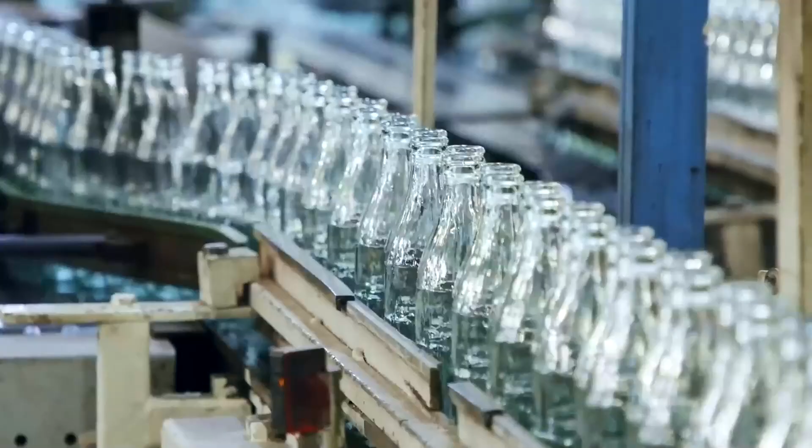2 billion tons of waste are produced by humans every single year. Glass makes up nearly 20% of this global mass. One can notice how discarded bottles accumulate in landfills, where a single unit persists for over 1 million years without breaking down. But this is just the beginning.

Why is this durability actually an industrial advantage? It seems counterintuitive for waste management, because glass can be recycled forever without ever losing its original quality. At first glance, broken shards appear to be useless debris, but in reality, they are ready for infinite reuse.

Hundreds of tons of material arrive daily at one of the world's largest recycling factories. The raw glass moves toward machines that will turn messy fragments into clean, shiny bottles. It gets more complex further on. The unbelievable journey of sustainable recovery is now underway.

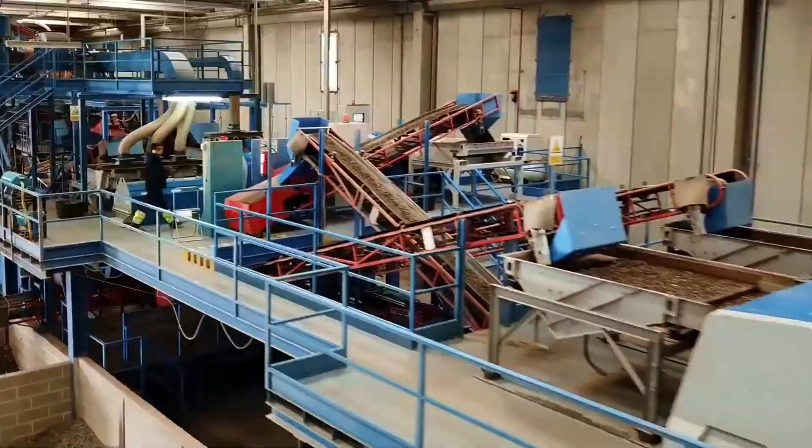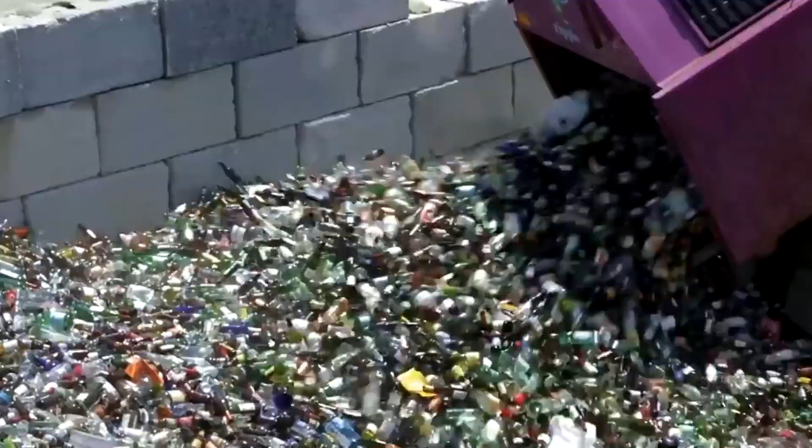10 to 20 cents? This is the precise value assigned to a single empty glass bottle in many European countries. Why is such a specific price tag attached to what appears to be garbage? At first glance, tossing an empty soda container into general waste seems like a convenient disposal method. But in reality, this mixes glass with household refuse, making the subsequent sorting process prohibitively expensive and technically difficult.

To handle this problem right at the source, automated return machines are installed across city streets. Consumers simply place an empty bottle into the intake, and one can notice how the device immediately scans and sorts it. A small refund is issued, meaning a freshly finished beer bottle transforms from waste into a valuable asset with cash value.

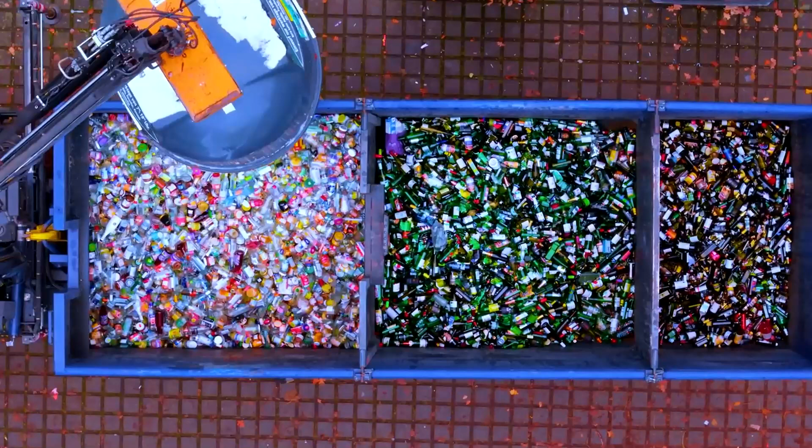This approach motivates people to collect bottles on their own, providing factories with a stream of glass that is pre-sorted, clean, and consistent. But this is just the beginning of the logistical journey.

When the reverse vending machines are full, collection companies deploy specialized trucks to pick up the accumulated glass. Forklifts lift large plastic bins, each holding thousands of empty bottles, onto the cargo beds. A single full-size truck can carry between 20,000 and 30,000 bottles in one trip, equal to about 10 to 12 tons of material. Trucks loaded with these tens of thousands of empties make their way from supermarkets directly to the recycling plant.

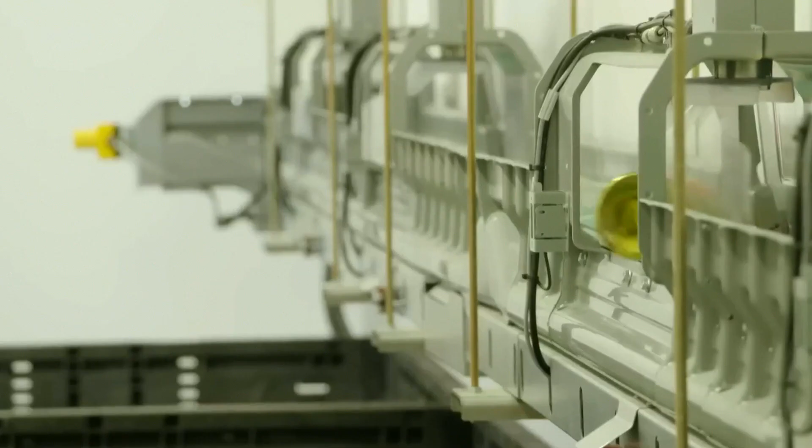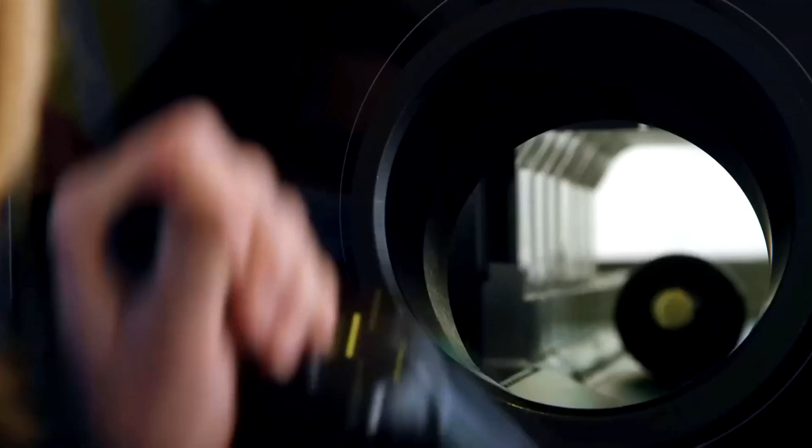Upon arrival, the drivers back up to a massive storage bay and release the load, sending a cascade of bottles tumbling down. In just minutes, the ground fills with colorful mountains of glass that sparkle under the industrial light. Greens, browns, and clears stack together in giant heaps. These piles are not just waste. They are the starting point of the entire recycling chain. A steady supply of raw material now lies ready to be cleaned and crushed.

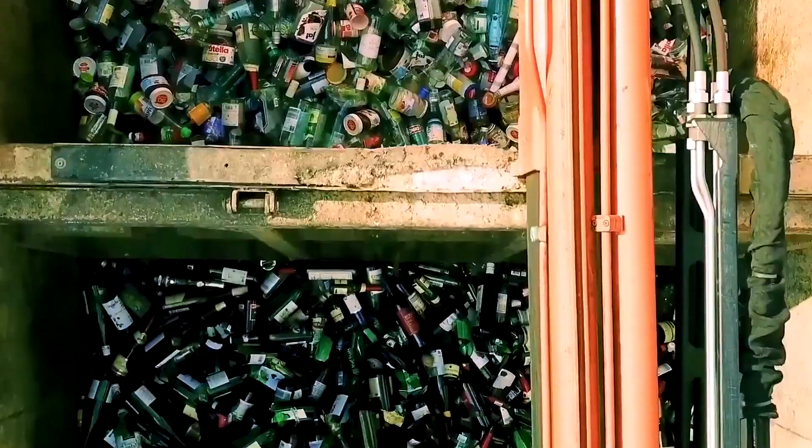Tens of tons of waste glass tower in chaotic piles, awaiting their turn for transformation in the recycling yard. Massive loaders drive up to the mounds, their engines straining as they scoop up huge loads with reinforced buckets to carry across the facility. With a thunderous crash that echoes through the site, the glass is finally dumped into the plant's feed hopper, sending a sharp cascade of shards sliding down the steel chute.

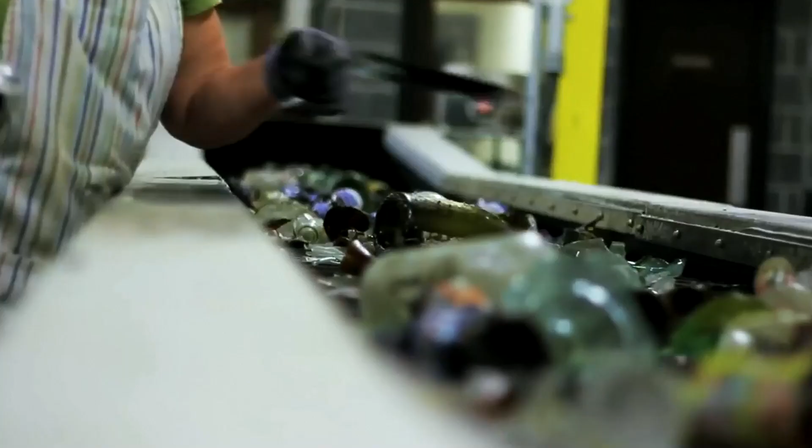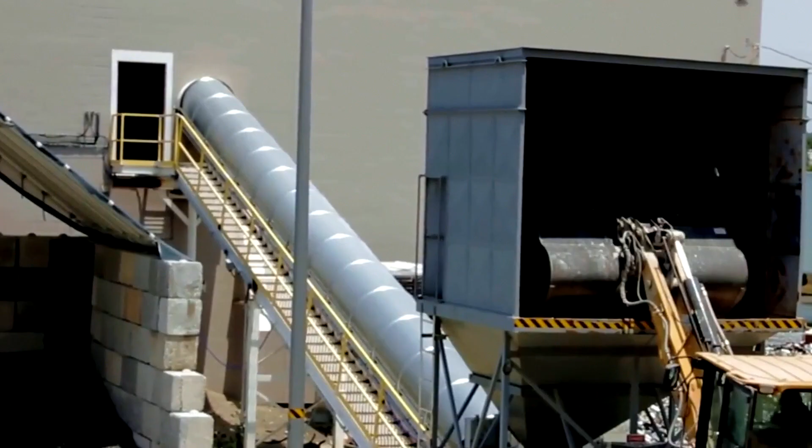This aggressive start launches the material into the recycling cycle, but the path to purity is long. The steel conveyor immediately starts moving, carrying the jagged stream of glass, still heavily mixed with dirt and sand, deep into the heart of the facility for processing.

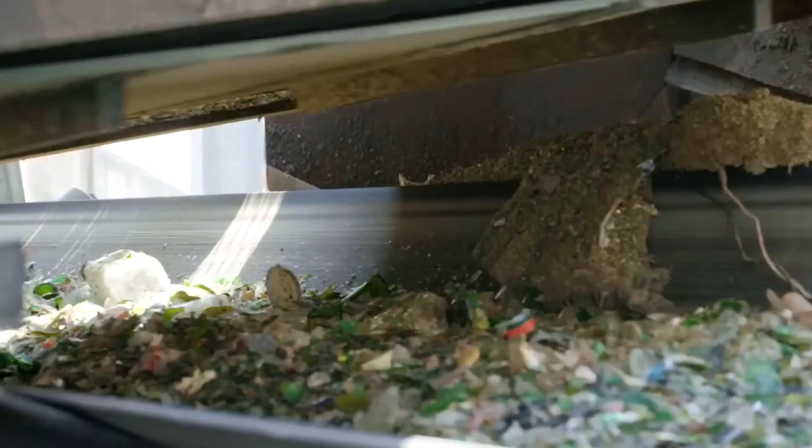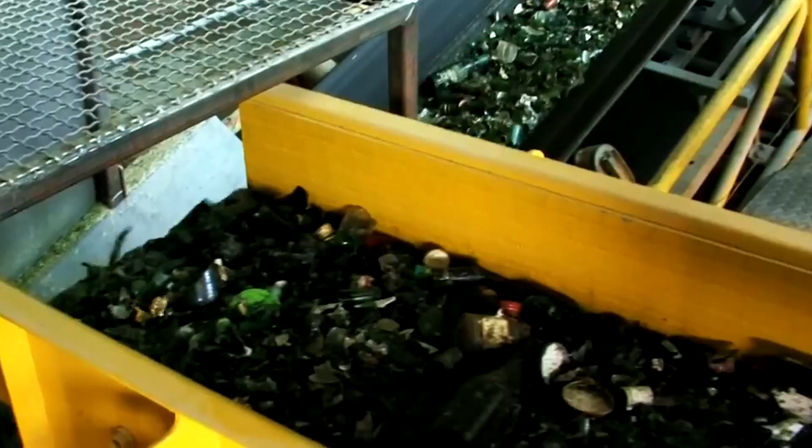At first glance, the vibrating screen looks like a simple sieve, but it performs a critical separation. Powerful mechanical shakes dislodge and filter out dust, grit, and tiny particles that would otherwise contaminate the melt. One can notice how the fine debris falls away, leaving the main glass flow significantly cleaner. However, larger contaminants that machines cannot easily detect still remain in the stream.

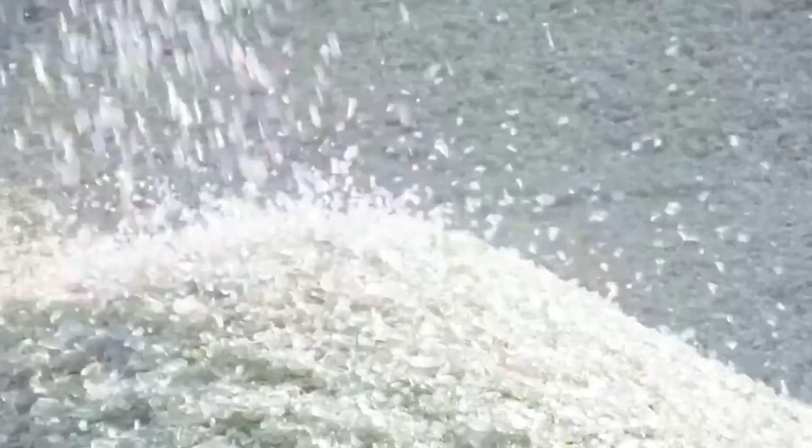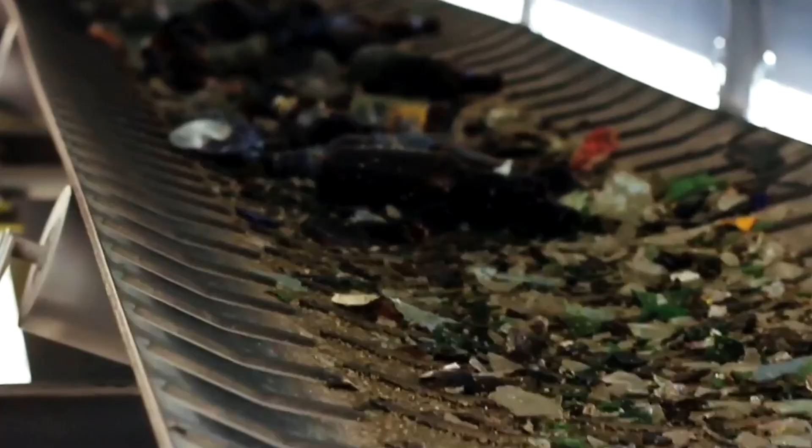Along the conveyor belt, human oversight comes into play. Workers stand ready at the line, their eyes scanning the moving belt to carefully pull out paper, plastics, and any other foreign objects that do not belong. This blend of mechanical screening and manual precision produces a much cleaner batch of material, ready for the next step in the recycling journey. It gets more complex further on.

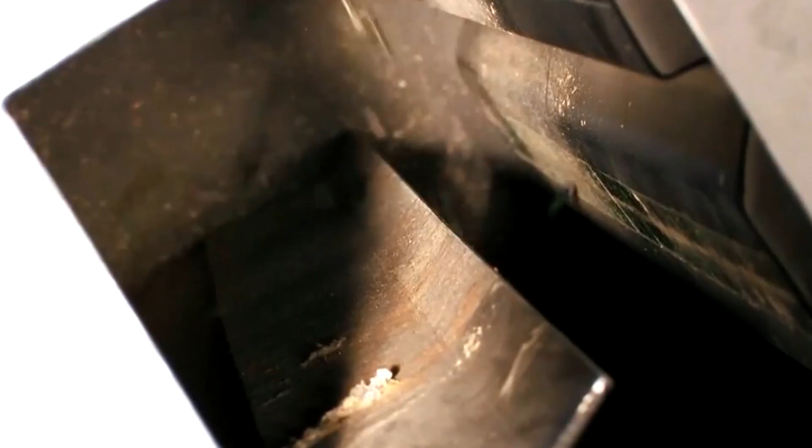Do you know what is still hiding in that moving pile of broken glass? To the naked eye, the flow seems to consist only of transparent shards, but the bottle caps are often made of metal, posing a severe threat to the furnace. Fortunately, a high-powered magnetic separator solves this problem effortlessly. The principle is simple yet effective.

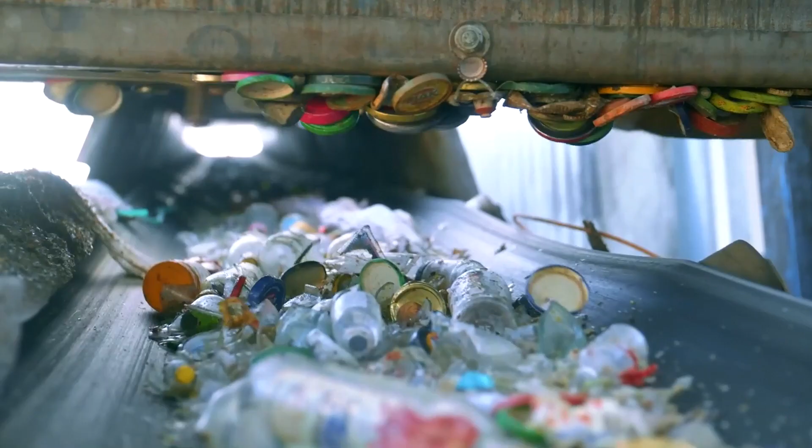A strong magnetic field grabs the bits of steel and lifts them away, while the non-magnetic glass keeps moving down the conveyor undisturbed. Thanks to this step, the raw material is now about 80% clean and one step closer to its journey of rebirth.

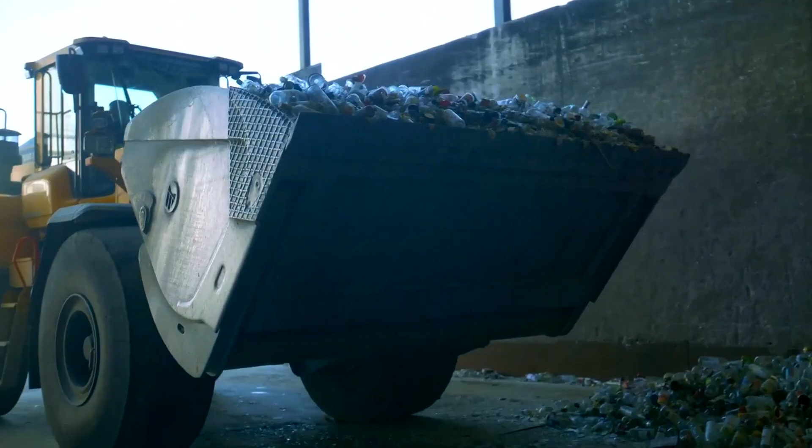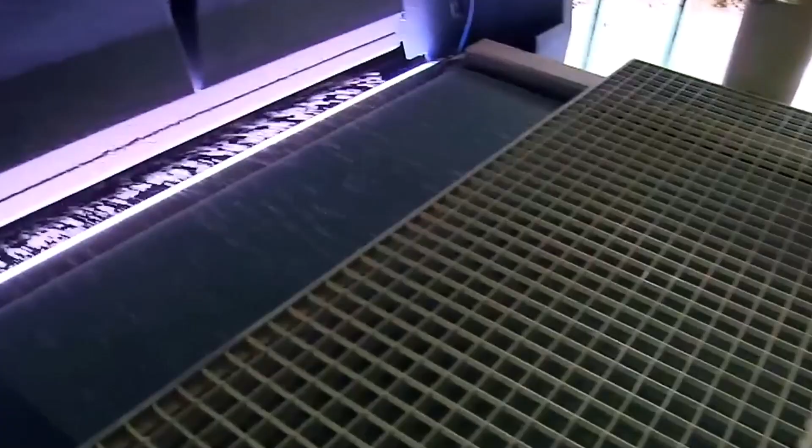The glass moves on to the next crucial step, being ground into cullet within a hammer mill. A massive machine with high-speed rotating hammers smashes the glass over and over until only tiny fragments remain. Any pieces that are still too big are automatically detected and sent back through the mill until they reach the right size. This ensures the entire glass stream becomes uniform, with no stragglers slipping through the cracks. The process creates cullet, fine, sparkling glass particles that look almost like man-made sand.

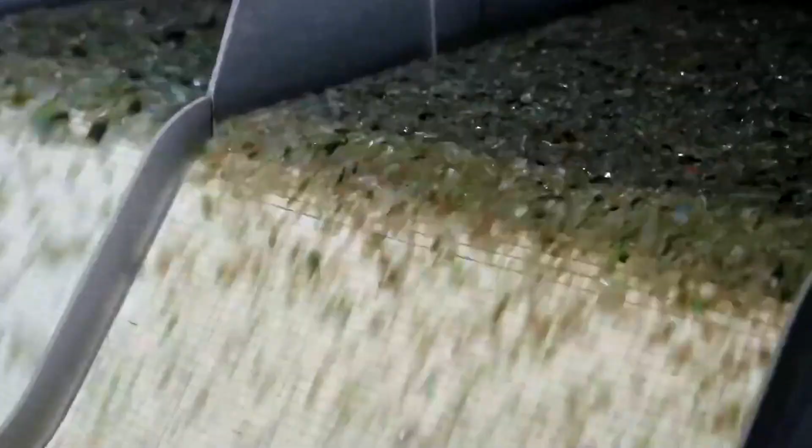Because it is broken down so small, cullet melts much faster in the furnace, saving up to 40% of the energy compared to using raw materials like sand or limestone. And this is not the limit. One can notice how the cullet enters a powerful suction system, where a strong stream of air strips away and blows off any leftover label fragments, leaving the glass even cleaner.

Optical sorting represents the most precise step in the entire process. As the glass cascades down like a shimmering waterfall, laser sensors continuously scan each tiny fragment to detect its color and composition. The moment brown glass, green glass, or even a stray ceramic shard is identified, the system instantly fires a precise puff of air, shooting it into a separate stream.

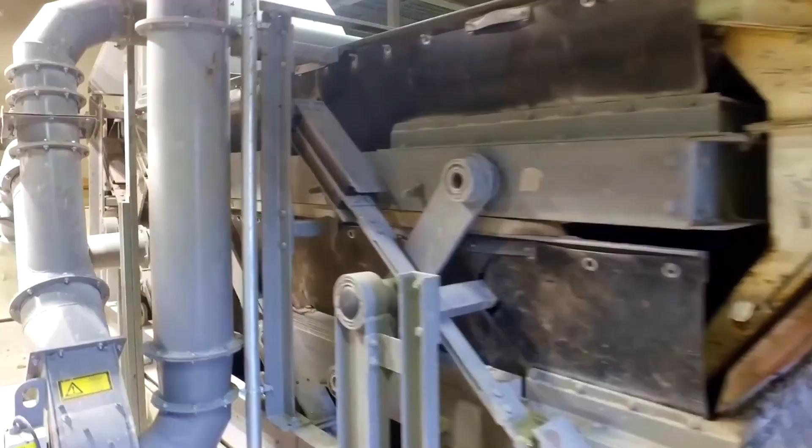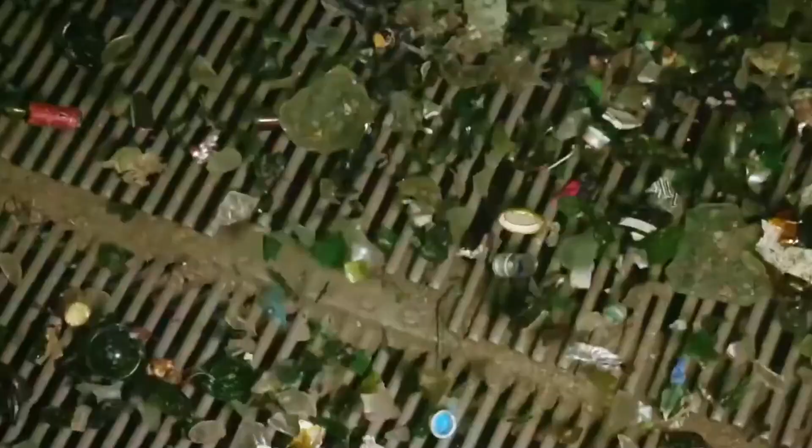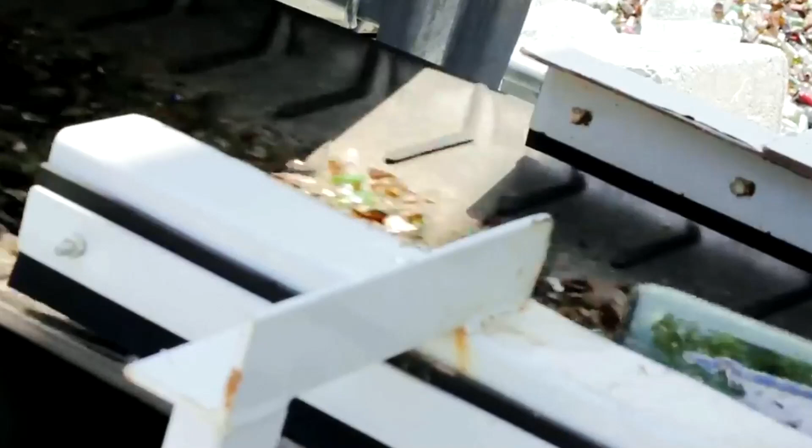The speed is almost unbelievable. Tens of thousands of pieces are processed every single minute. This guarantees that the cullet is sorted with perfect accuracy by color, because even the slightest mix of the wrong shade would ruin the quality of the recycled glass. Thus, the sorted cullet continues moving along the conveyor belt, directed into separate storage areas where it piles up into massive stockpiles, calmly waiting to be transformed into brand new glass bottles.

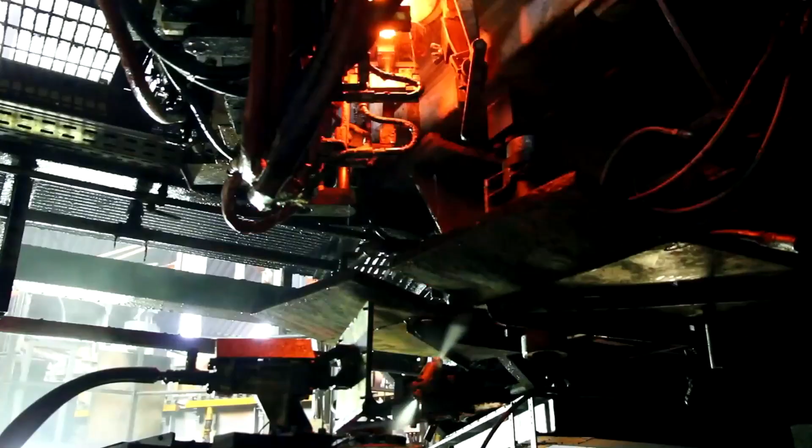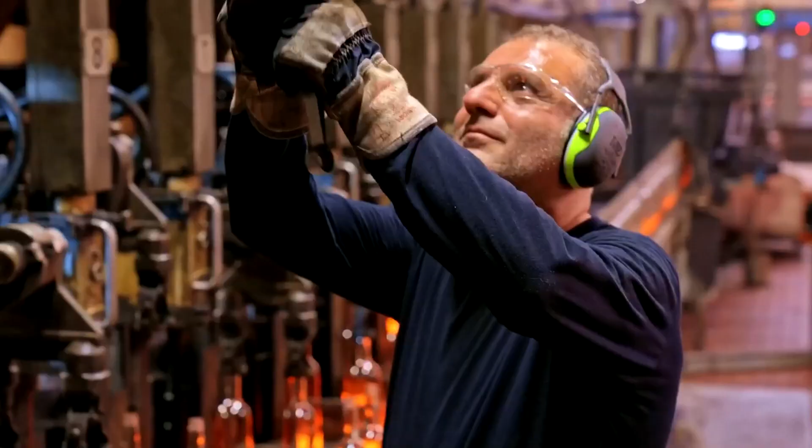70% is the maximum proportion of the batch that can be comprised of cullet, or recycled crushed glass, waiting to be transformed. This recycled material cannot enter the furnace alone after sorting and grinding, as it requires a precise blend of raw ingredients to stabilize the melt. The recipe begins with pure silica sand, which serves as the primary element bestowing clarity upon the future glass.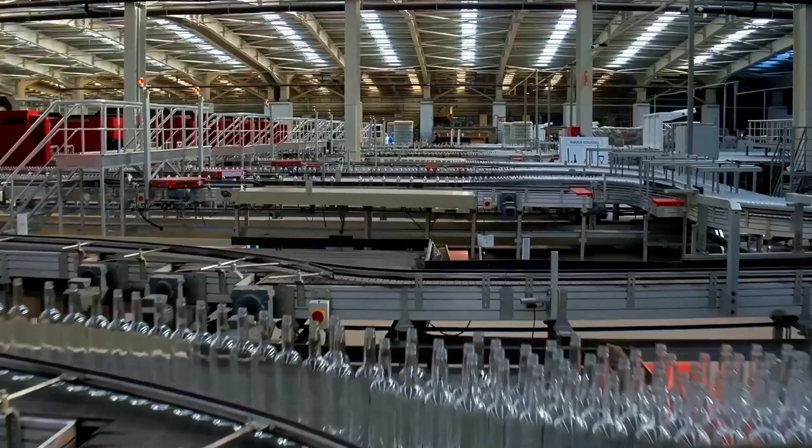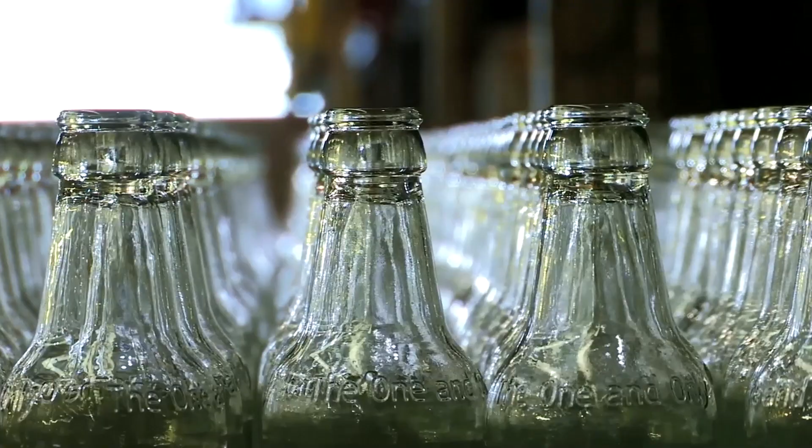Engineers then introduce soda ash or sodium carbonate to significantly lower the melting temperature and conserve energy throughout the entire firing cycle. Limestone is added to the composition to strengthen the final structure and ensure stability once the form hardens. In specific formulas, manufacturers also mix in dolomite, alumina, or various metal oxides to strictly adjust the color and physical properties.

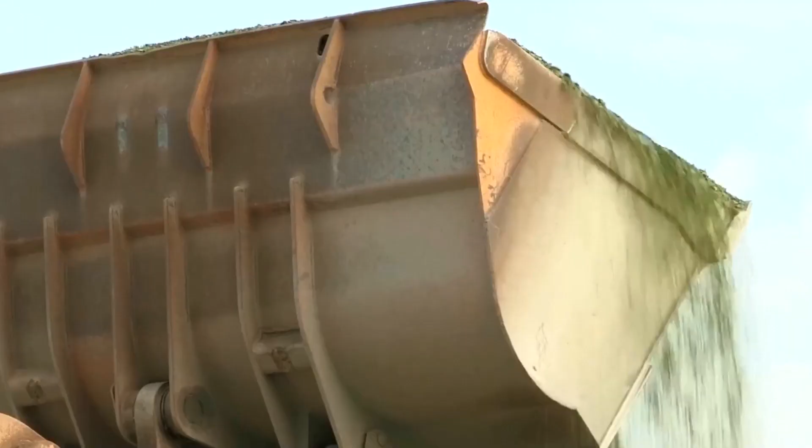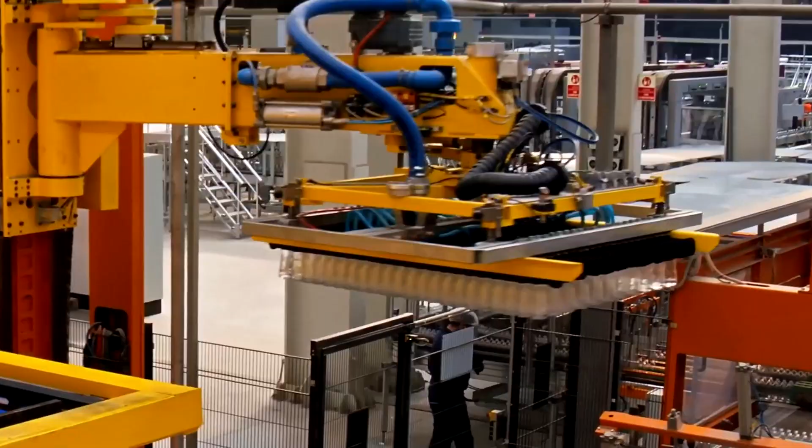Why is the inclusion of cullet considered the most critical part of this industrial recipe? To the untrained eye, it might seem that fresh raw materials would yield a purer product, but without cullet, the mixture would require excessive heat, whereas this recycled component allows the melt to flow faster and cuts energy use by up to 40%. Consequently, adding just 10% more cullet to the batch reduces total energy consumption by about 3% and significantly lowers carbon dioxide emissions.

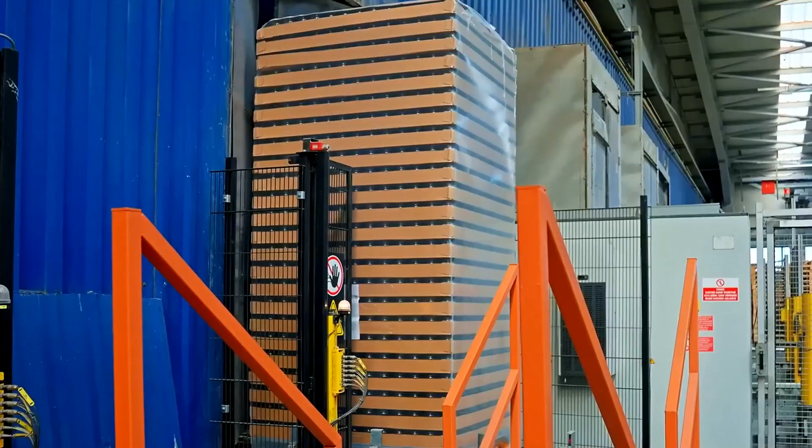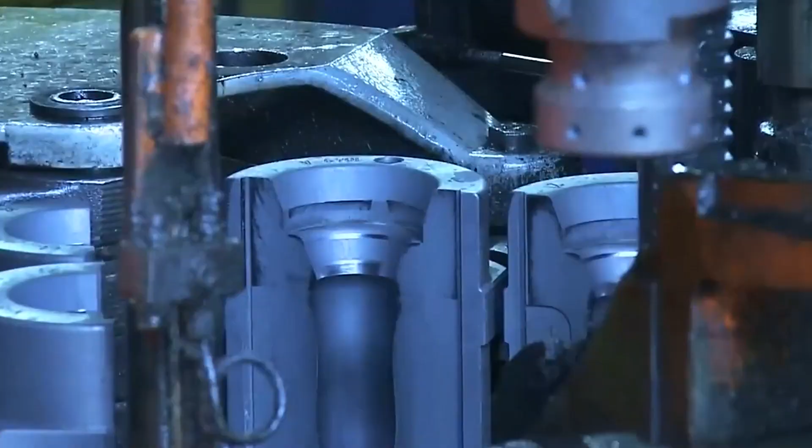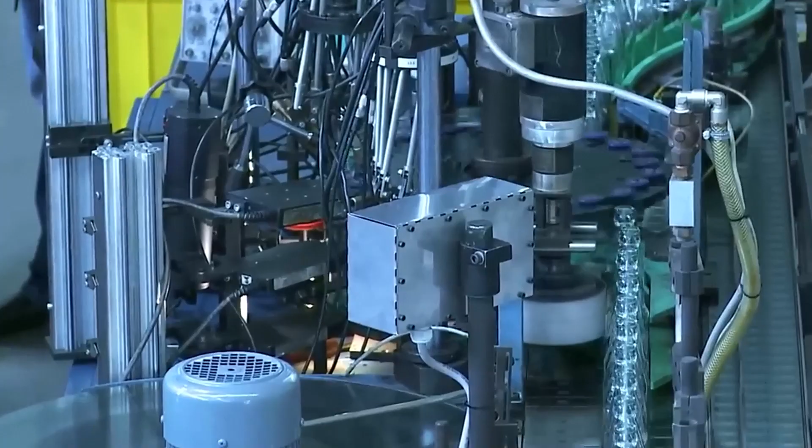Once the formulas are determined by the factories, the mixture is blended until perfectly even and prepared for the thermal processing stage. The mix is then fed into a massive gas furnace, where the temperature rises to about 1,750 degrees Celsius, which is hotter than molten lava erupting from a volcano. One can notice how the granular mixture gradually turns into a dense, glowing liquid under the intense heat. But this is just the beginning of the transformation.

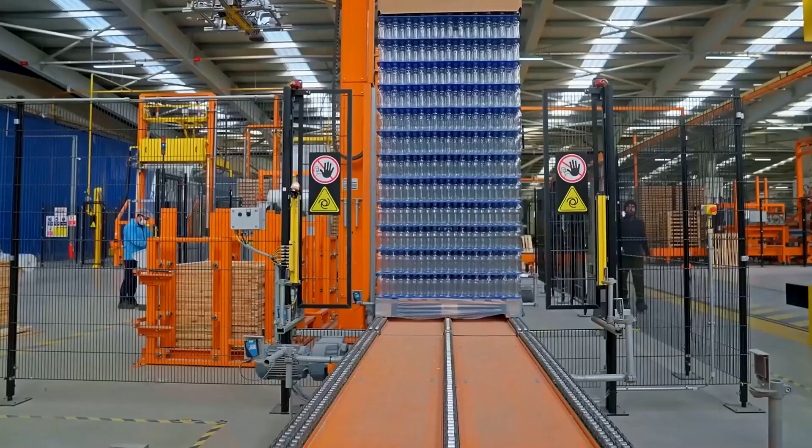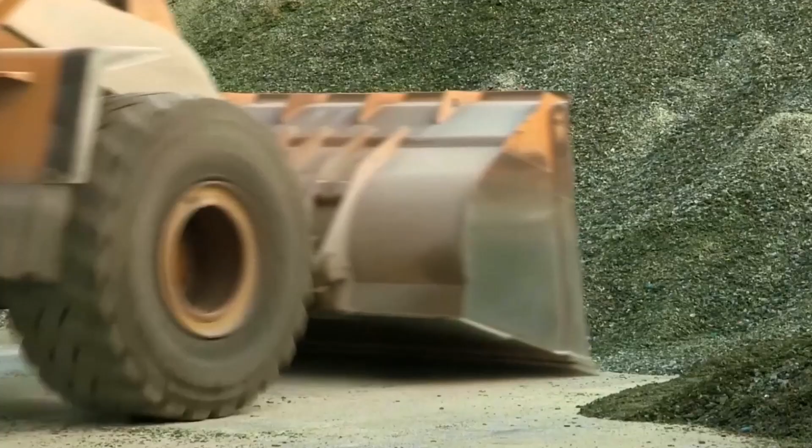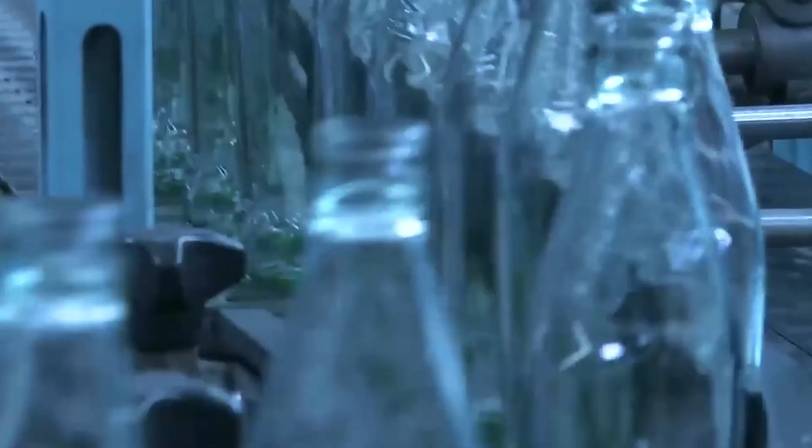Workers inside the facility must wear specialized fireproof suits and heavy protective gloves to survive the environment. The surrounding heat, reaching nearly 3,000 degrees, is almost unbearable for the human body without protection. Once the ingredients stabilize, the mouth of each crucible is hermetically sealed to maintain these extreme thermal conditions and control the melting process. At first glance, melting seems like a rapid phase of liquefaction, but in reality, it requires 24 hours for the sand to turn into a substance that flows thick like lava.

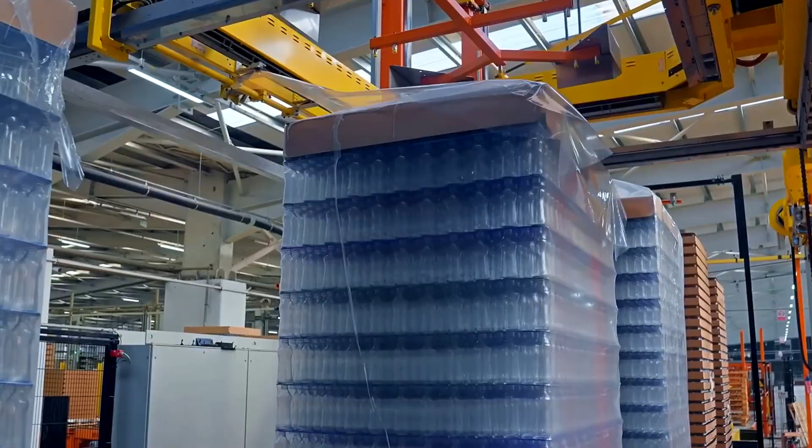The brilliant glow at the bottom of the furnace reveals liquid glass, a dense, shining mass that has finally reached the perfect temperature and viscosity. For the next 5 hours, the glass remains in this molten state to allow any remaining gases to escape, ensuring the highest purity in the final material. Therefore, to give this liquid mass a specific form, a mold is required, making mold creation the next pivotal step.

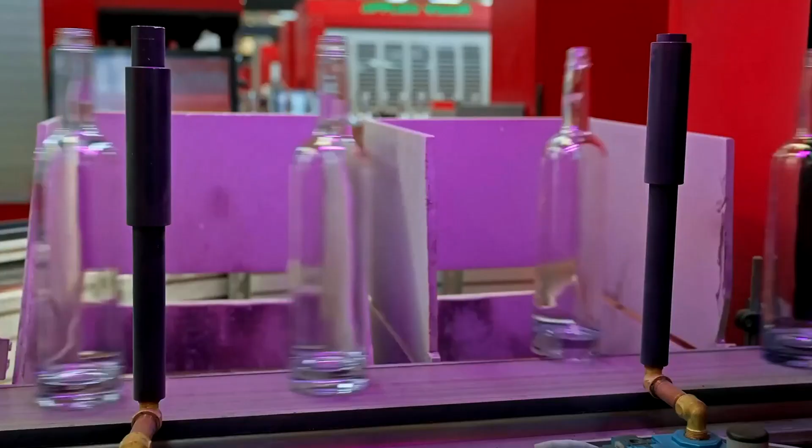Engineers employ advanced computer-aided design software to draft the mold with high precision, controlling every line, dimension, and thickness to meet rigorous technical standards. From this digital blueprint, molds are manufactured using cast iron or alloy steel, materials capable of withstanding temperatures of up to about 1,400 degrees. These forms are then prepared to receive the molten glass and shape it from the inside out.

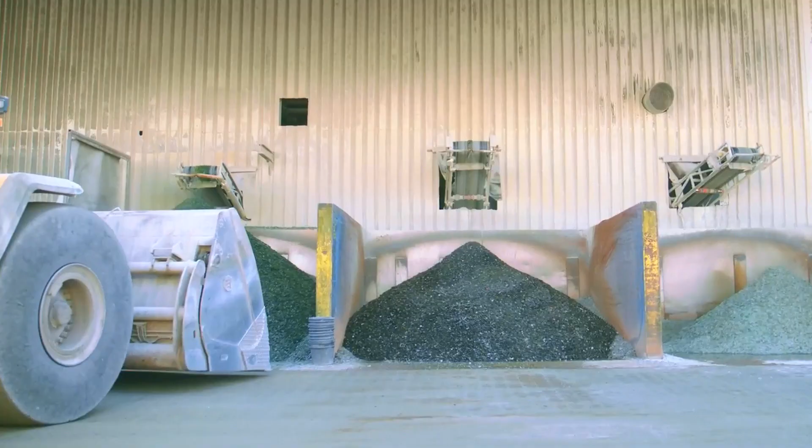Once the molds are fully completed, they are carefully installed into the double blow production line, which remains one of the most reliable methods for shaping hollow products like soft drink bottles and food jars. The forming process initiates by dropping distinct lumps of molten glass, known as gobs, into the initial blank mold. These gobs are severed from a continuous stream of liquid glass, reaching temperatures of around 1,011 degrees Celsius, possessing the perfect viscosity for consistent shaping.

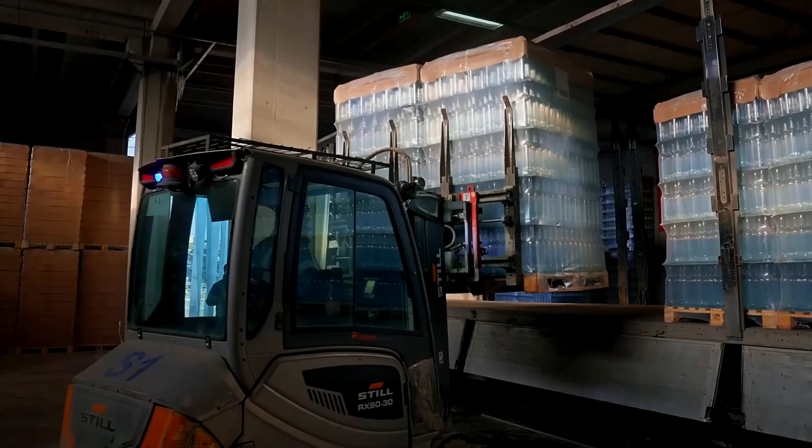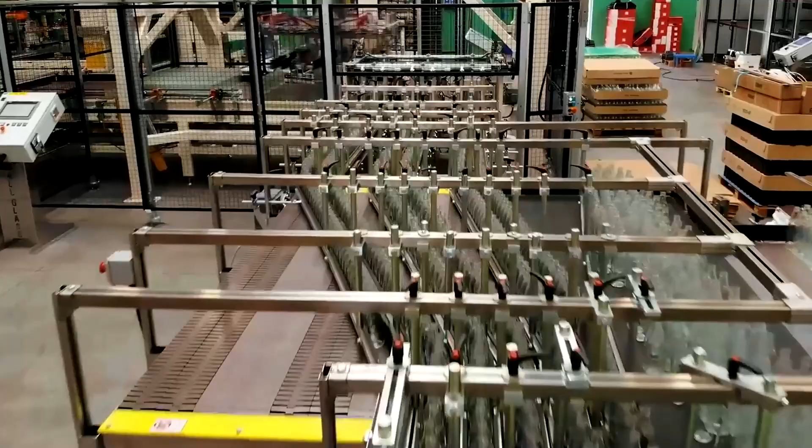Inside the preliminary mold, a powerful jet of compressed air is blown in from above, pushing the hot glass outward against the metal walls. This action forms the initial shape known as a parison, which resembles a hollow, bubble-like structure with a narrow neck. Still glowing with intense thermal energy, the glass is gently transferred to the final mold, located just a few inches away on the same production line.

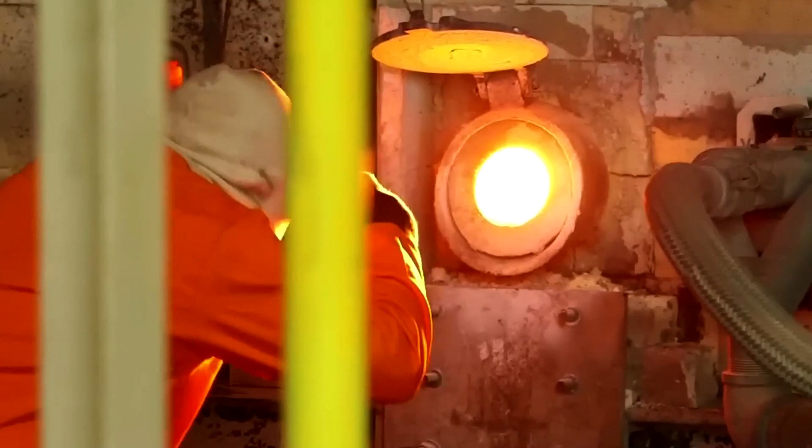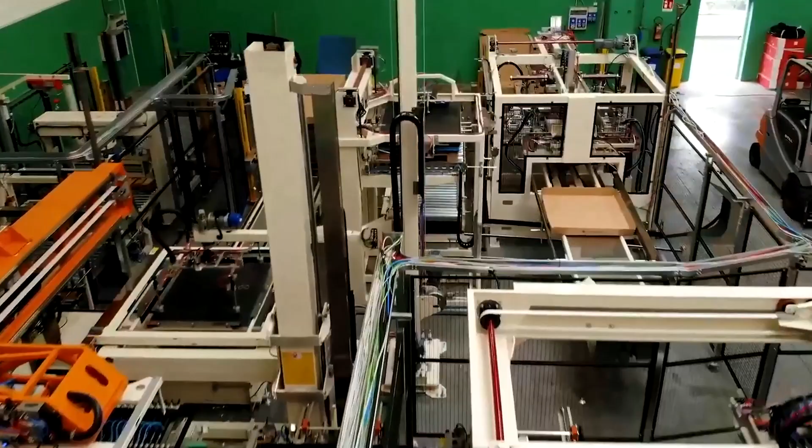It gets more complex further on. Here, a second burst of compressed air is shot directly into the center of the parison, stretching the softened glass outward until it presses tightly against every contour of the mold's inner cavity. In just a matter of seconds, the full shape of the bottle takes form.

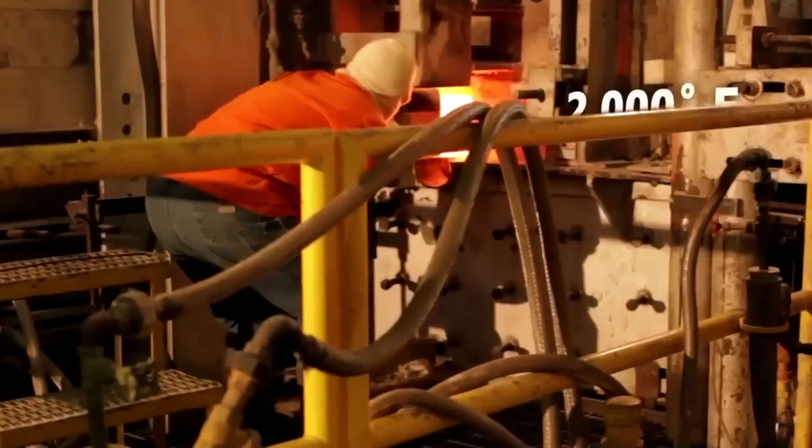It seems like a simple mechanical repetition, but in reality, every valve and sensor is synchronized down to 1,000th of a second. This extreme level of control enables the manufacturing of hundreds of thousands of bottles per day, each nearly identical and flawless. One can notice how the glass bottles, just released from the oven, radiate a deep red heat, their surfaces shimmering in the dark like glowing metal rods.

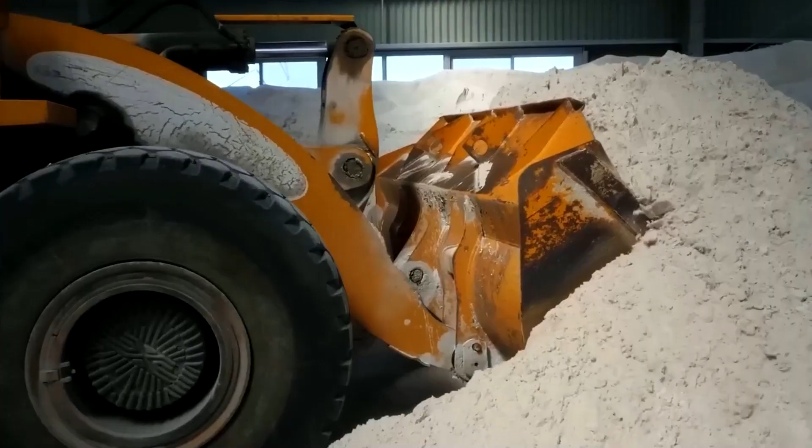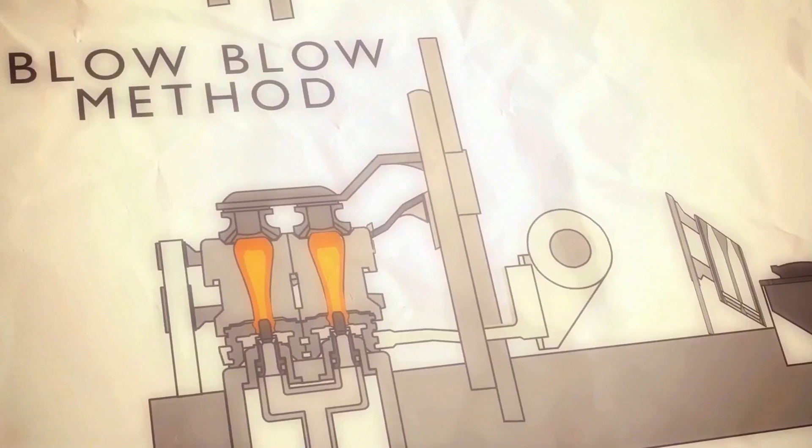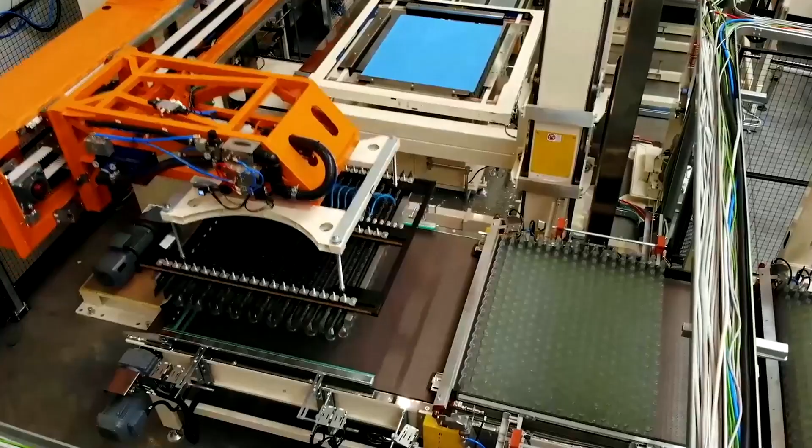Dark mechanical arms then move in with seamless programmed precision, gliding effortlessly into place to retrieve the ware. Each bottle is lifted with care and set down onto the moving conveyor belt. The whole scene unfolds in calm silence, perfectly synchronized without a hint of haste. The conveyor belt slowly guides the newly formed bottles, their bases still glowing with residual heat, toward the cooling area.

They travel through a long yellow tunnel where the temperature lowers little by little, giving the glass time to settle safely without cracking from thermal shock. This careful annealing stage takes its time. It may last several minutes, and sometimes even stretches to tens of minutes before the material is fully stabilized.

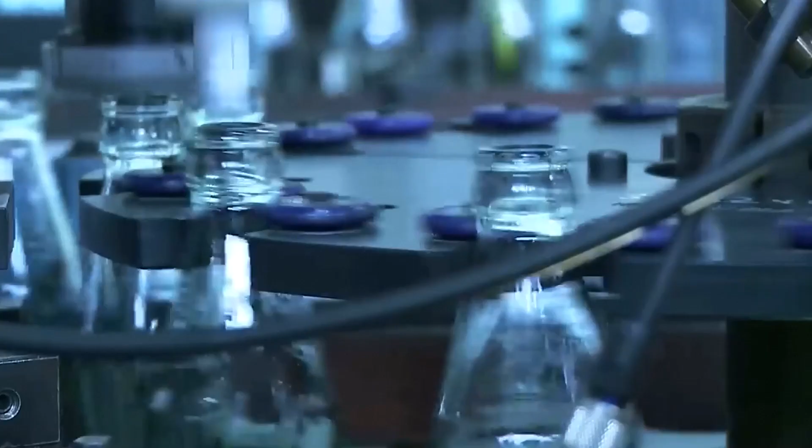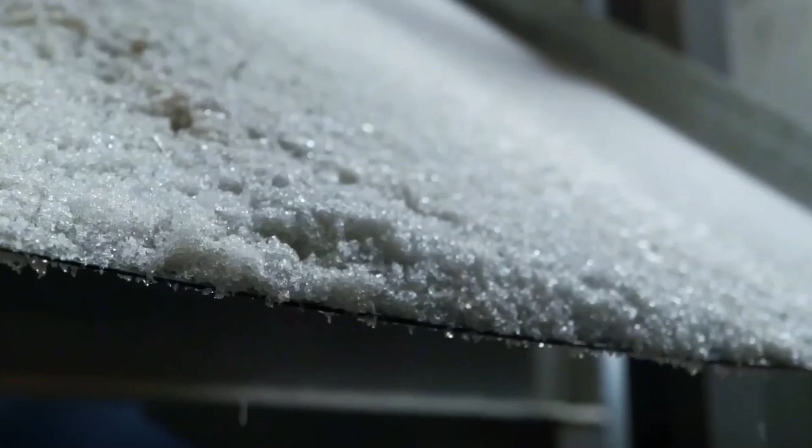As the process moves forward, the cooled glass bottles reach the inspection stage. Here, an array of optical sensors and high-speed cameras examines each unit in real time. Every detail is checked, and the moment a defect appears, whether it is a crack, a bubble, a scratch, or a tiny warp, the system immediately flags it and pulls the bottle off the line.

Transitioning to the next level of quality control, the system focuses on a close examination of the bottle's mouth. Each bottle is rotated with precision by an automated mechanism, while optical sensors and mechanical probes team up to detect flaws, such as a chipped edge or the smallest deviation in dimension. Only bottles that pass this strict check are allowed to move forward to the packaging zone.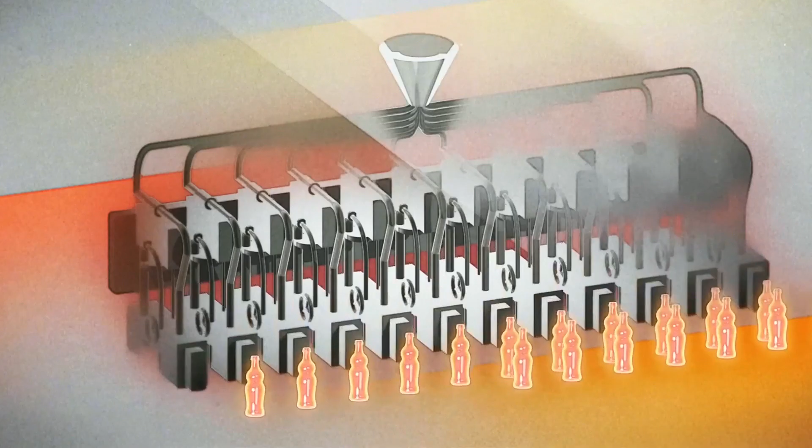When the stack is finished, an automated wrapper secures the pallet in film and tags it with a code corresponding to its production batch. Finally, the glass pallets are moved into storage, neatly stacked and waiting for transport. From here, the bottles travel across the globe, ready to be filled and serve their purpose in daily life.

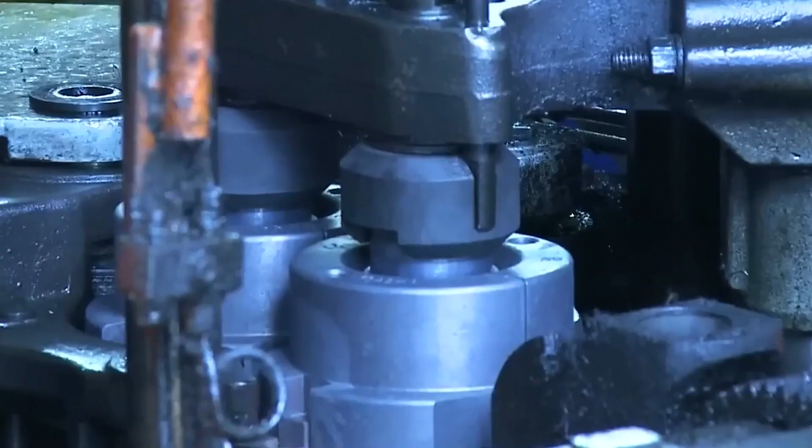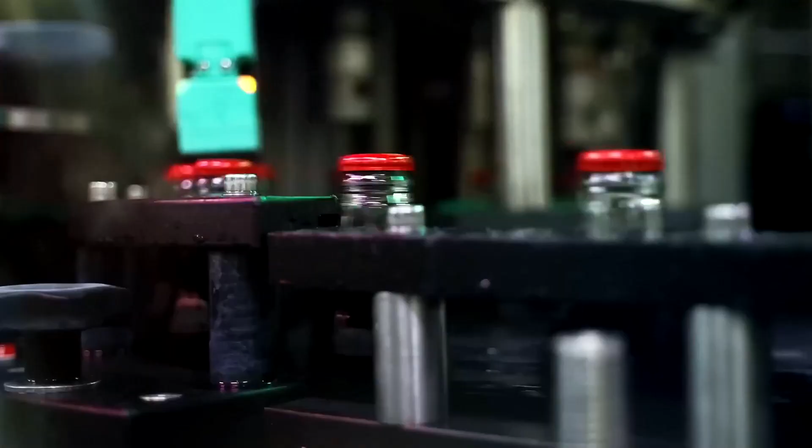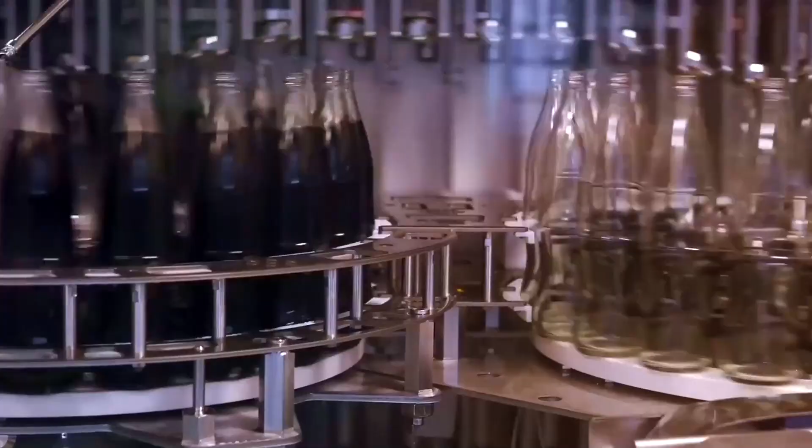High-pressure hot water and steam blast into the bottles to strictly eliminate any dust or bacteria. Why is such intense thermal treatment required for apparently clean glass? To the naked eye, the containers look ready for use immediately upon arrival. However, this rigorous cleaning stage is mandatory before the world's most iconic soda touches the glass. The process is only gaining momentum.

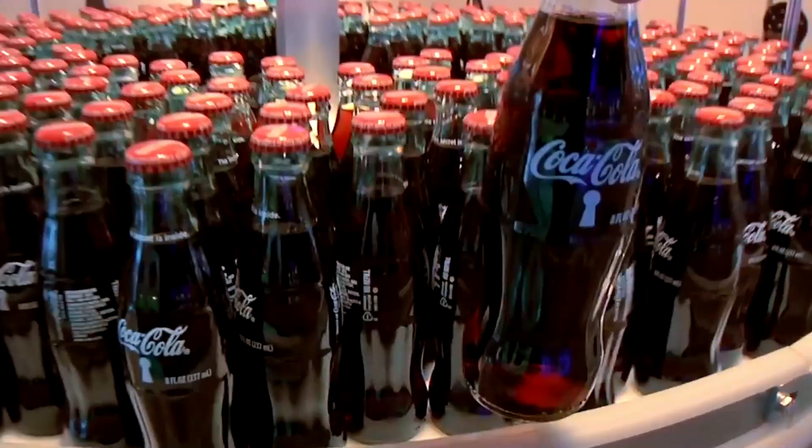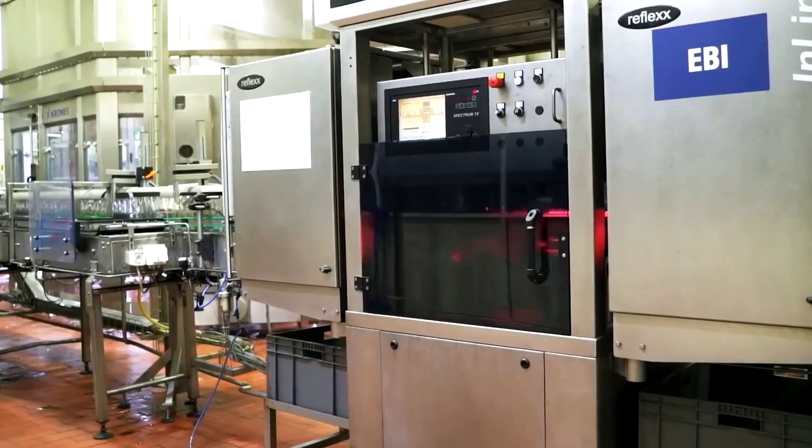One can notice how the clean bottles move down a high-speed conveyor to the filling station. Automated nozzles descend to fill each one with Coca-Cola, measuring the volume down to the exact milliliter. Simultaneously, carbon dioxide gas is injected to lock in that signature fizz. Precision machines at the capping station press crown caps onto the rims immediately after filling.

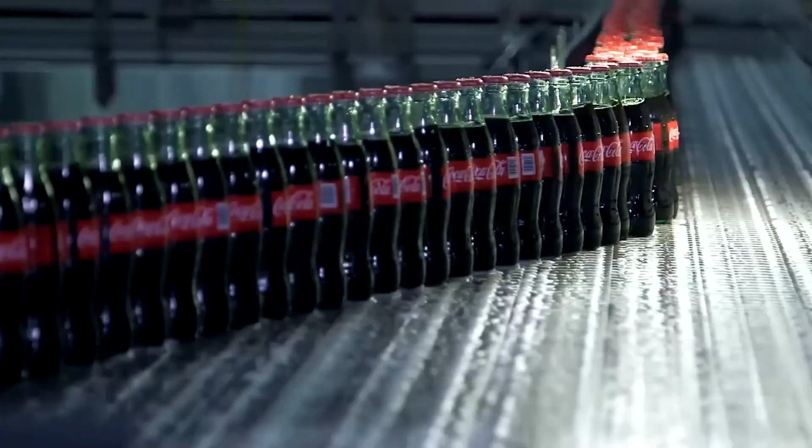High-precision sensors integrated into the line conduct a detailed inspection for tightness. At first glance, capping seems like a basic mechanical step, but in reality, it ensures every bottle is perfectly sealed against leaks. And this is not the limit of the quality control measures. A high-speed camera system scans the glass for cracks, overfilling, or misapplied labels.

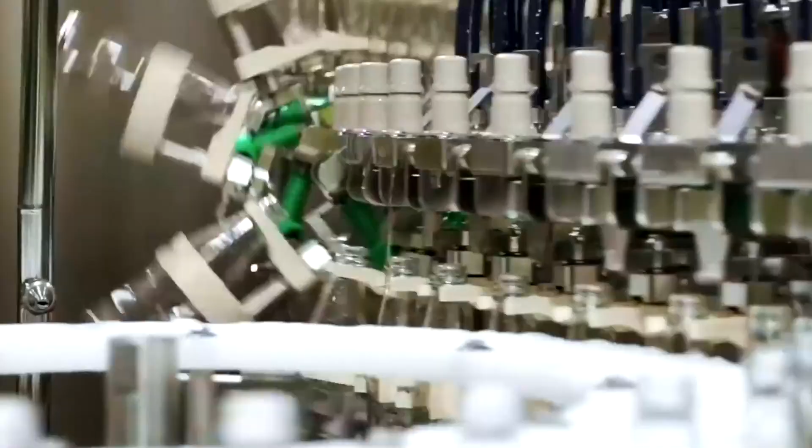It is visible how the Coca-Cola bottles continue gliding smoothly along the conveyor belt, lined up in perfect formation like a programmed assembly. They move through this stage with a steady, precise rhythm toward the water spray station. A high-pressure jet of cold water hits the neck of each bottle to finalize the exterior cleaning.

Therefore, the perfectly sealed bottles are packed into cartons and loaded onto pallets for distribution. The stock moves into cold storage, ready for the global supply chain. The product is shipped to millions of stores worldwide, from small roadside shops to luxury hotels. The beverage waits for the customer in its finished form.

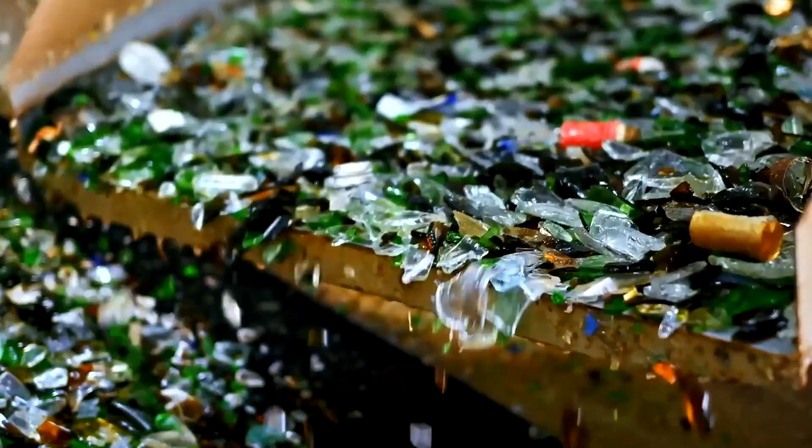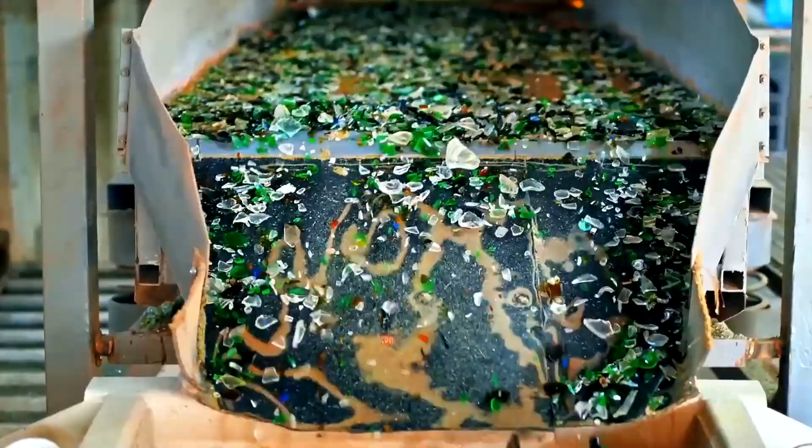Why is this closed-loop system critical for industrial sustainability? The aesthetic appeal of the glass is obvious to the eye. It serves as a physical confirmation that technology can bypass the need for raw resource extraction, preserving the environment through engineering. One can notice how the automated systems handle the fragile items with gentle precision.

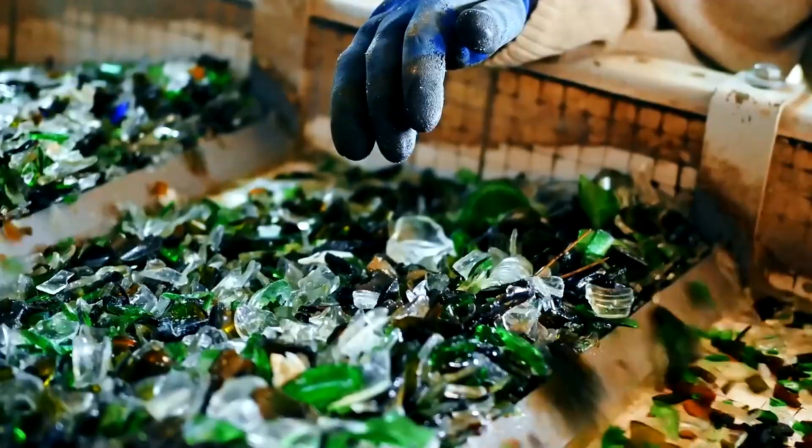The glass is now chemically identical to virgin material, ready for immediate use. But this is just a pause in the loop. The material retains the potential for infinite future processing without loss of quality. The product leaves the factory, fully restored and prepared for distribution.